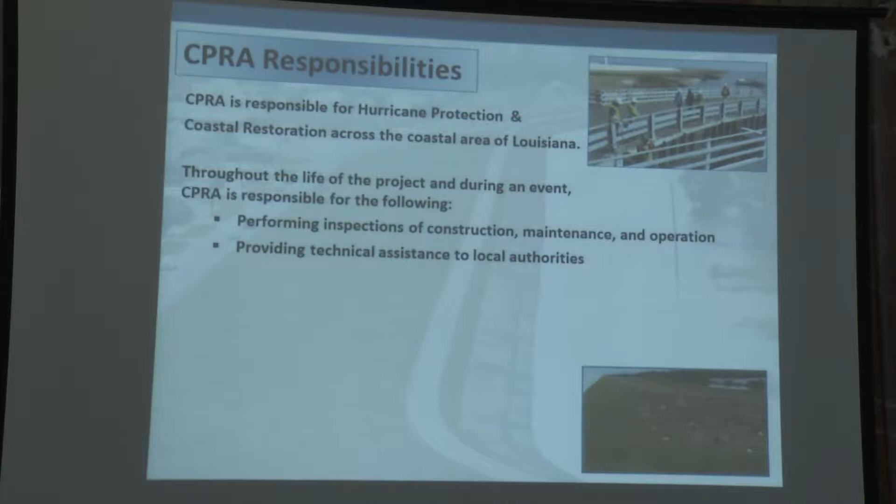Since we're partners in all of this, we rely on them sometimes to give us some technical assistance. We also review a lot of permits. I know you guys have seen a lot of work going on, and there's companies or anybody that wants to build something near the levee. We, along with the Corps, have to approve that project, and at the end, the local SLFPA-East, for instance, is the one that gives these permits out. But again, we do the engineering, we check all of this, make sure things are right, and the Corps does the same thing. We do a levee inspection training class every year, sometimes twice a year, depending on how many people request it, and we do a certification.

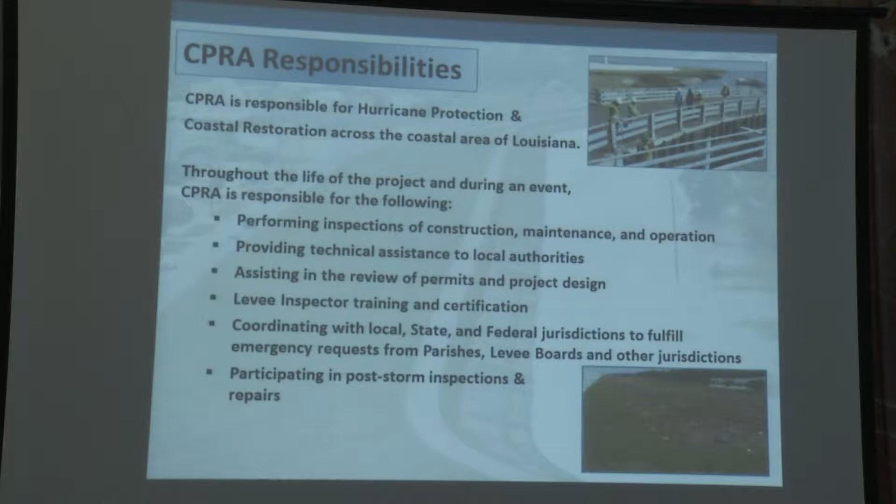We also coordinate with local, state, and federal jurisdictions to fulfill emergency requests from parishes, levee boards, and other jurisdictions. We also, after a storm, participate in inspections with the Corps and the levee districts to make sure we know what happens and what repairs need to be done, if any.

So, talking about the HSDRRS system, this system, as you guys know, was $14.5 billion. It's about a $14.5 billion system that was designed by the Corps of Engineers. It consists of 350 miles of levees and flood walls, 73 pump stations, 3 canal closure structures with pumps, and 4 gated outlets. This system is to reduce the surge and rainfall risk from a 100-year storm.

So the perimeter of the system, I'll show you in a second, is comprised of levees and flood walls, and that's to reduce the surge. Then you have the rainfall risk. For that, there's closure pumps, a lot of storm proofing done internally, and some drainage canals that were improved.

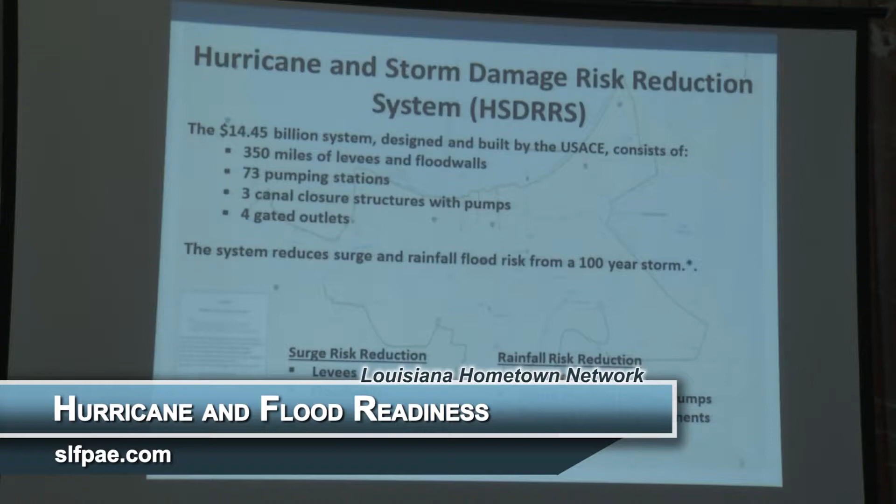So at the end, like I said before, we have to pay this back. It's a $3 billion payback that the state has, and it equates to about $100 million a year for the next 30 years.

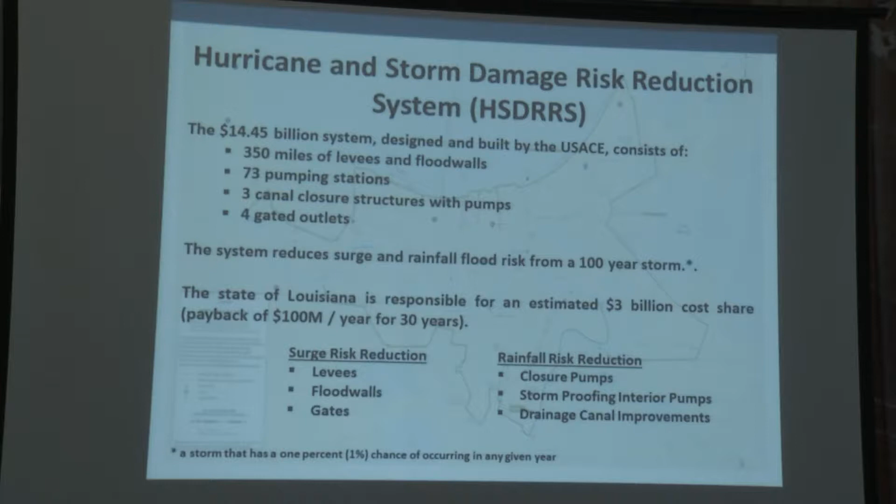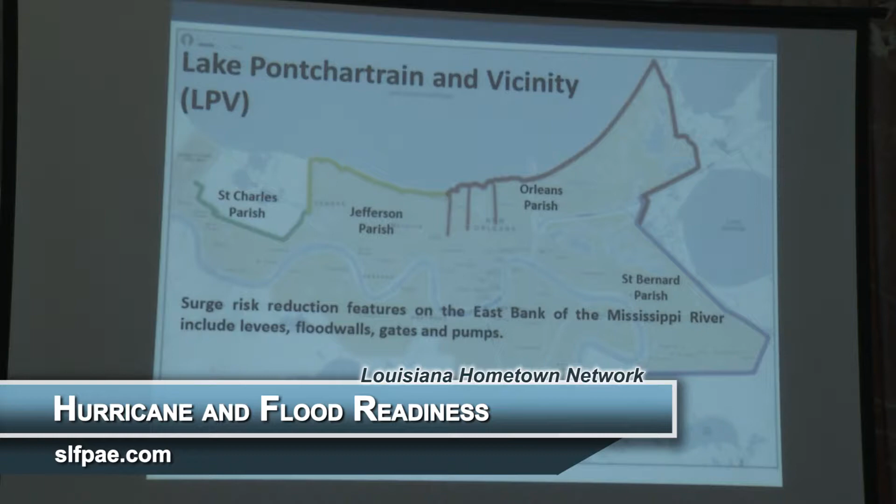So this system, we look at it in 2 parts. We call it the Lake Pontchartrain and Vicinity Project, which we refer to as LPV, and the West Bank Project, which is WBV. Right now, what you're looking at is the LPV project. In that project, it's to reduce storm risk on the east bank of the Mississippi River, and it includes levees, flood walls, gates, and pump stations.

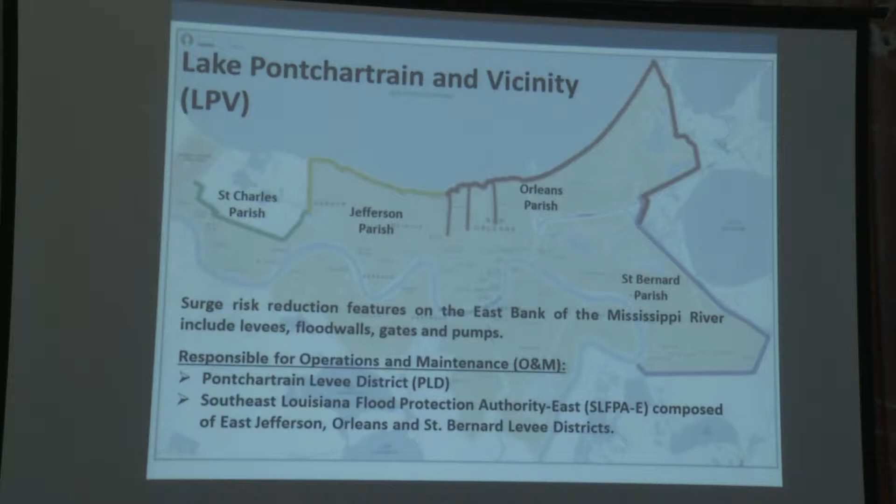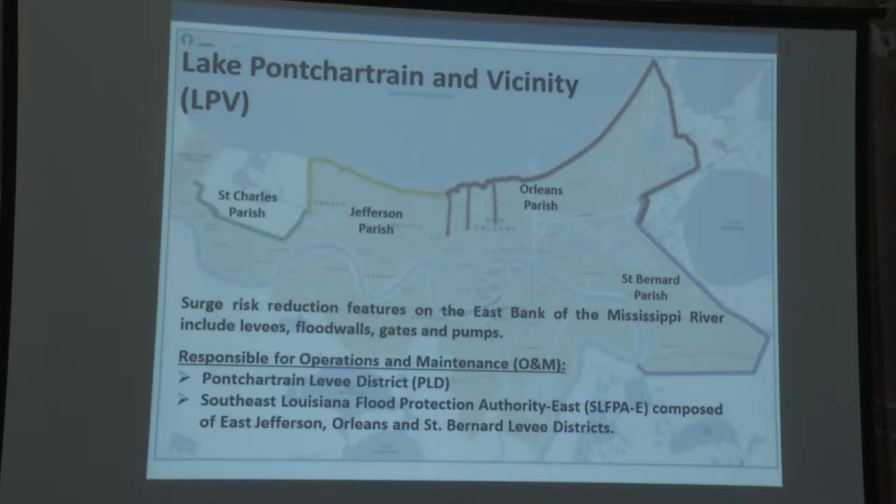Once the projects are turned over by the Corps of Engineers, we have to turn it over to the local levee districts. For the LPV project, it's the Pontchartrain Levee District and SLFPA-East, which is the Southeast Louisiana Flood Protection Authority East. SLFPA-East is composed of East Jefferson, Orleans, and St. Bernard, and they're the ones that operate from the yellow line to the blue line that you see on the screen.

Again, it's a system, so there were a lot of upgrades and a lot of things that were done, and one of the projects is the outfall canals, which we call the OFC canals. This is where most of the New Orleans rainwater during a storm drains through. The improvement was that the levees were lined on both sides of the canals with flood walls situated on top of each levee, so it was basically hardened. The improvements are along 3 main drainage outfall canals in New Orleans: 17th Street, Orleans Avenue, and London Avenue. Who's responsible for operations and maintenance? SLFPA-East.

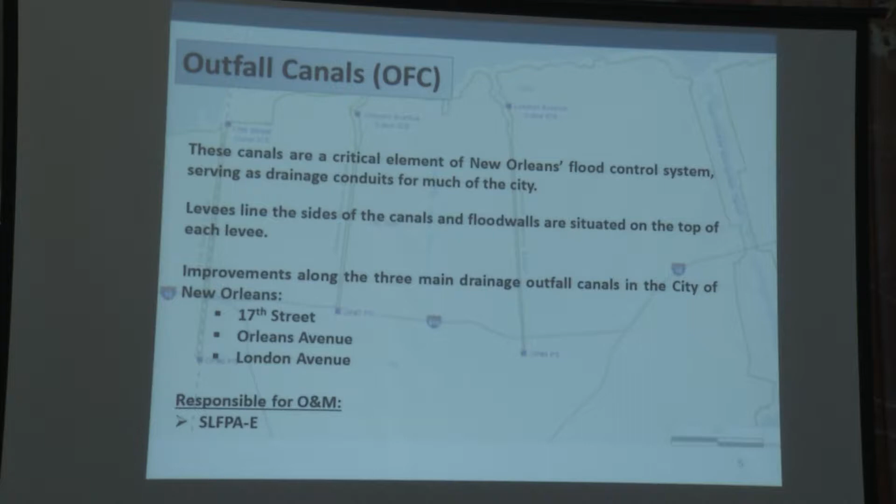Then you have the permanent canal closures and pumps, which we call the PCCP project. That's an ongoing project comprised of 3 pump stations, one located on 17th Street, the other Orleans and London, like I said before. So that water that comes in from the city goes straight to these pump stations and is operated accordingly.

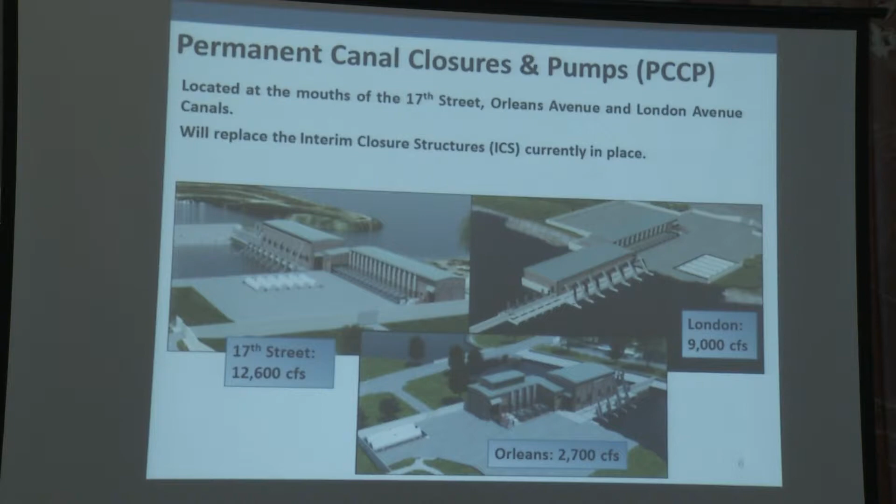I know you guys have seen that there are some old pump stations out there. We call those the interim closure structures, or ICS structures. Right now, if there were to be a storm to come into the city, those would be the pumps operated during the storm. The Corps of Engineers operates it. There's a water control manual on how and when you operate these pump stations.

The 3 pump stations that you see, which we call the PCCP project, are expected to be completed and turned over to us before the next hurricane season.

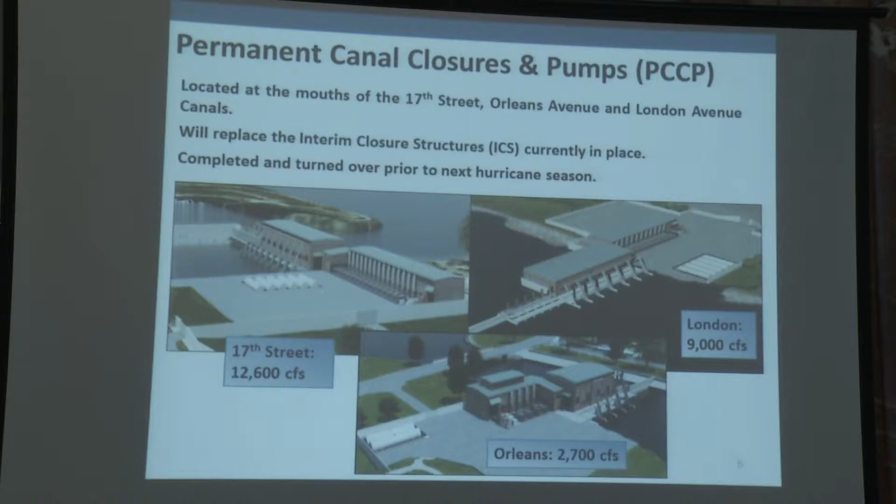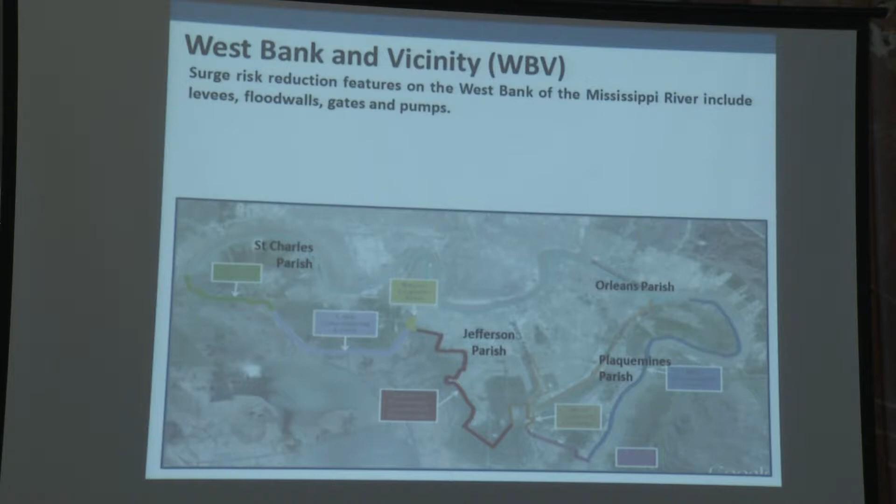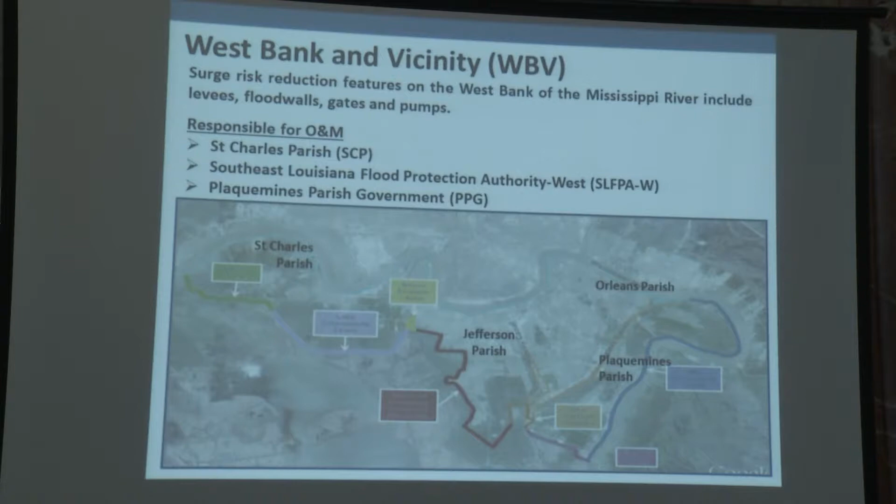So now I'm talking about the West Bank and Vicinity project, and I'll run through that again. It's the same thing as the LPV project: levees, flood walls, gates, and pumps were built on that system. Who's responsible for O&M? It's St. Charles Parish, the Southeast Flood Protection Authority West, and Plaquemines Parish.

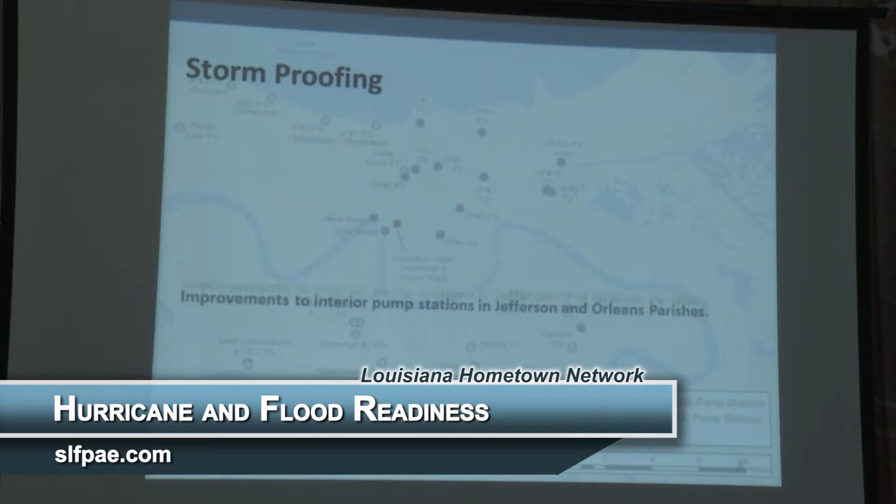Okay, so now we're getting into the internal part. I just went on the periphery, the external part of the system. So again, there was a stormproofing project internally. Those improvements were to interior pump stations in Jefferson and Orleans parishes.

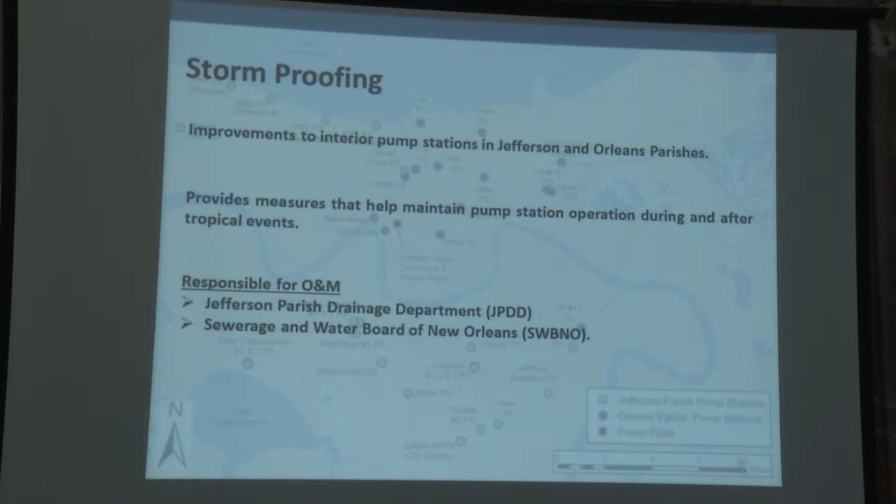These stormproofing measures help maintain pump station operations during a storm. So what does that mean? The stations were hardened, some of them were lifted, and where needed, an extra generator was put in. Different things were added as part of the stormproofing project. Who's responsible for O&M on this is the Jefferson Parish Drainage Department and the Sewerage and Water Board of New Orleans.

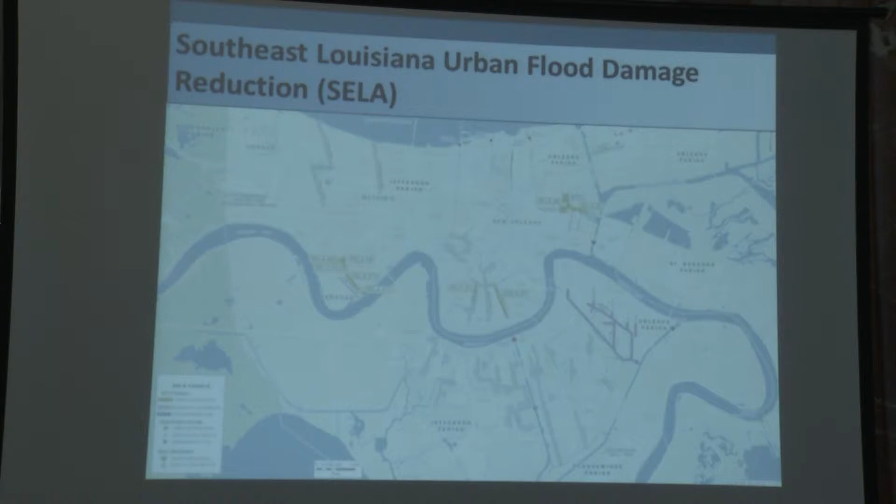Then we get to the SELA project. If you live in the city, you've seen a lot of construction going on internally - that's the Southeast Louisiana Urban Flood Damage Reduction System, the SELA system. That's an internal project to take care of rainfall, and it provides flood risk reduction up to a level associated with a 10-year rainfall event.

So what does that mean? It means a rainstorm that has a 10% annual probability of occurring, which equates to approximately 9 inches of rain over a 24-hour period in the area.

That system cost about $2 billion. There's been $2 billion of improvements in Jefferson and Orleans parishes, and it generally supports the parish's master plan. In other words, when we signed the agreement with the Corps of Engineers as the non-federal sponsor, we did a cooperative endeavor agreement with the local levee and drainage districts.

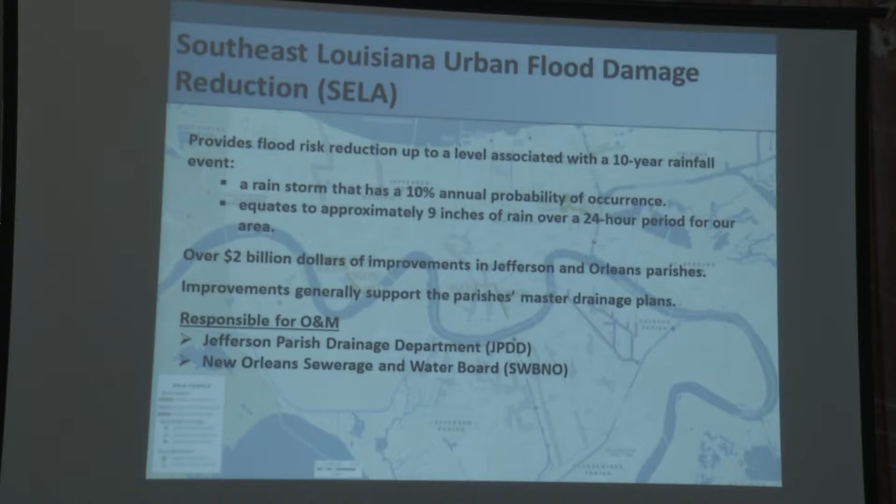In other words, they've been talking to the Corps of Engineers. They're basically designing their own project, and we're just the non-federal sponsor. At the end of all of this, they're also paying - Sewerage and Water Board and Jefferson Parish are the ones paying their cost share for this project to the federal government. So again, who's responsible for O&M on the SELA project? That would be Jefferson Parish Drainage Department and the Sewerage and Water Board of New Orleans.

And we have the armoring project ongoing right now. That armoring project is basically a resiliency feature added to the levees. So when storm surge comes over the levee, we didn't want scouring on the protected side. Think of it like a football field mat placed on top of these levees, with grass grown on top.

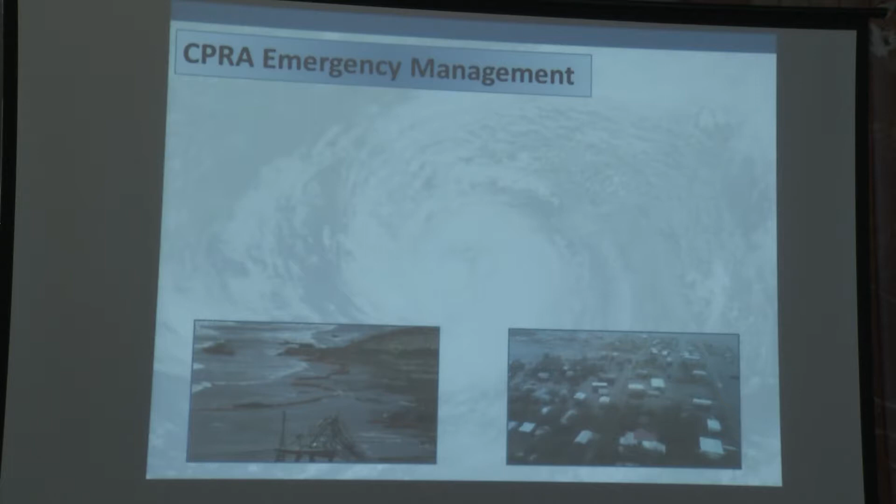I don't know if you guys are keeping up with the news, but that's part of our job too. My job is to keep up with the hurricanes and where they are and what's going on, so we can interact with the locals, the local entities, to make sure everybody's ready, the system's ready, the pump stations have fuel. I call it the big dance, because everybody's talking to each other. We're talking to the Corps of Engineers, SLFPA-East, Plaquemines Parish, everybody around the system.

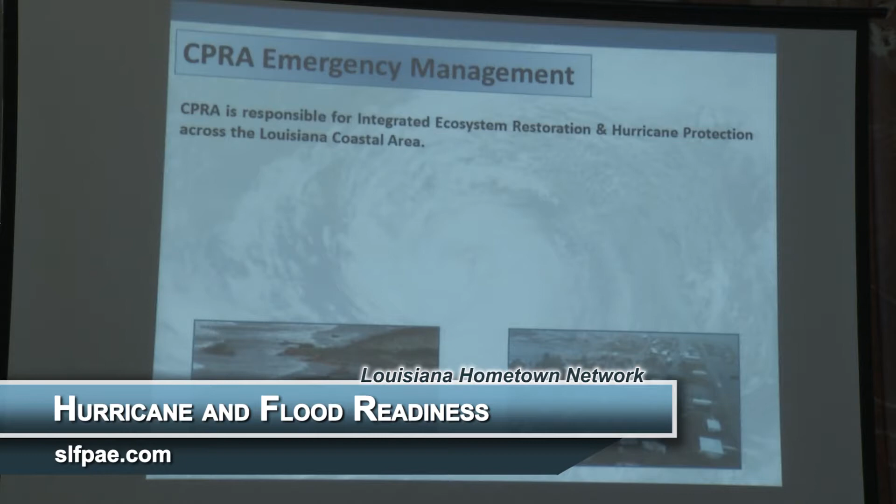So that's part of the other part that we do during a storm. Again, during hurricanes there's high water events, we get called in, and large-scale coastal oil spills or hazmat incidents.

What I'm going to talk about a little bit today is the inspection process. Joe asked me to talk about that when it comes to the work we do here at the authority. First I'll talk about the infrastructure we have to take care of, the things that make up the levee system that form the defense for hurricane storm surge and riverine flooding for the metropolitan area. Then I'll tell you about the inspection process, how that works, who's involved, and the different types of inspections we do.

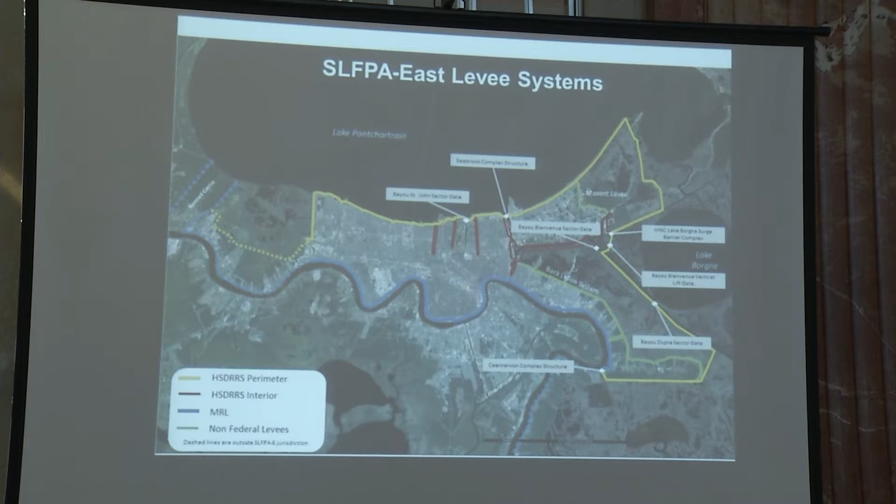This slide is basically a layout of our system, and you'll see different colored lines. The yellow solid lines are what we call our perimeter system for the hurricane storm damage risk reduction system. This is the front line of defense. The red lines are interior levees, interior to that perimeter system. They are no longer part of the main line of defense.

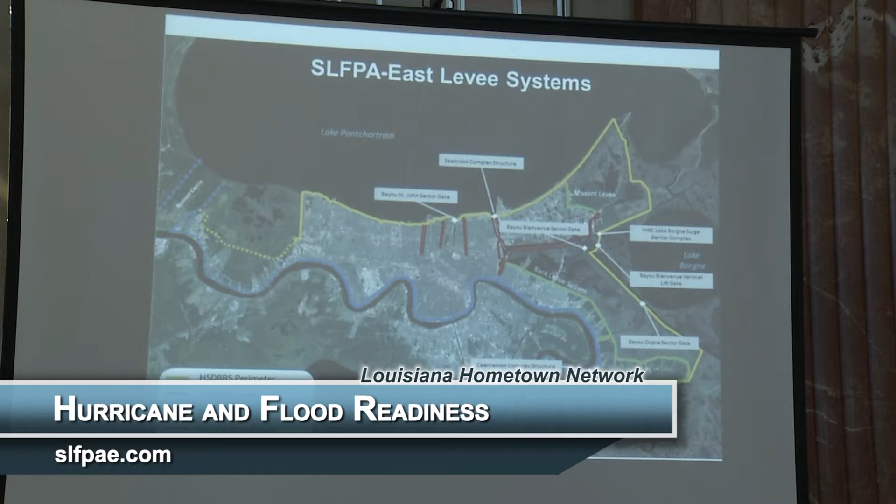Prior to Katrina they were, now they're not, but they're still needed because they still hold back water under certain circumstances, so they still have to be taken care of. Then you'll see some green lines, levees built over the years, typically by the local authorities. In some cases they were the original hurricane levees built many years ago. They're still in service today because they form a barrier for drainage, so when the rains fall and the pumps kick on, the water is pumped on the other side of these levees to keep the populated areas dry.

To give you an idea of what that equates to in statistics, we have over 192 miles of levees and flood walls within our jurisdictional area. That's a lot. Over 3,500 acres of turf that we have to maintain. It's a lot of grass cutting, and it sounds somewhat superficial.

You guys just cut grass, but let me tell you, that's a really important part of the job, because if we don't cut that grass, trees grow up on the levees, and the levees fall into disrepair. You can't take care of them, and they can develop leaks during a storm. Also, maintaining good turf cover prevents erosion. If you get a storm larger than the levee was designed for and the water comes over the levee, that turf keeps the levee from washing away.

Floodgates. Ignacio talked a little bit about this dance. Well, we have a well-choreographed dance that we have to do whenever there's a storm coming. We have over 240 floodgates that in a major storm we have to get out there and close. Our people have to go out there in inclement weather and difficult conditions to make sure all those gates are closed so the water doesn't come in.

A new addition to the system since Katrina are all these navigational floodgates. These are very complicated structures from a mechanical standpoint. Typically levee districts dealt with earthen levees and maybe some flood walls, but now we have these heavy-duty mechanical, electrical type structures that we're responsible for taking care of. We have 8 of those, and a couple are major structures. So a lot of infrastructure to take care of.

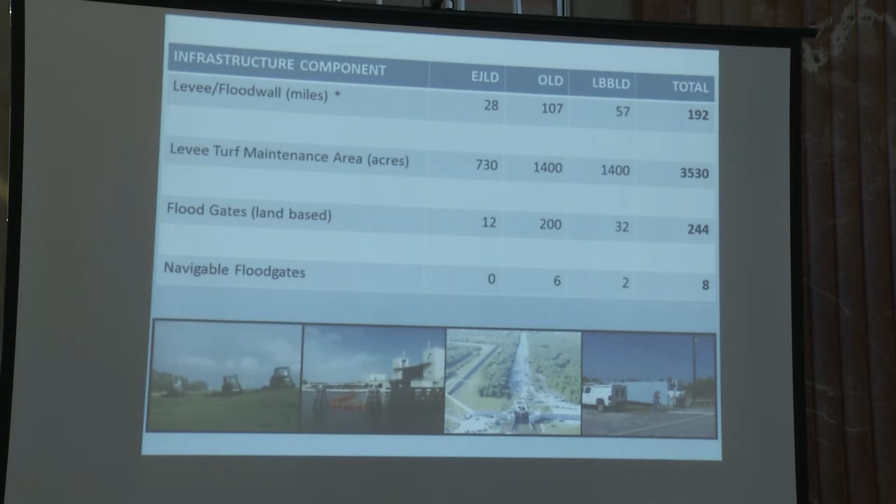And so we have to be good stewards of that $14 billion that Ignacio talked about. One of the ways that we try to make sure that we are doing our jobs well is we do a lot of inspections on the system.

We have what's called this levee inspection cycle. It starts off with field inspections. We have inspectors that go out there, look at all the various pieces and parts of the system, take notes, identify any issues that they think might be issues, and turn that in to the engineering department.

There's an engineering review of all those comments, all that data that's been collected in the field. The engineers take that and prioritize it, saying these are the things we need to address quickly, these are some things we have time to deal with, and perhaps there are other things we just need to monitor. We make that decision in our engineering department and prioritize those issues that we find in an inspection.

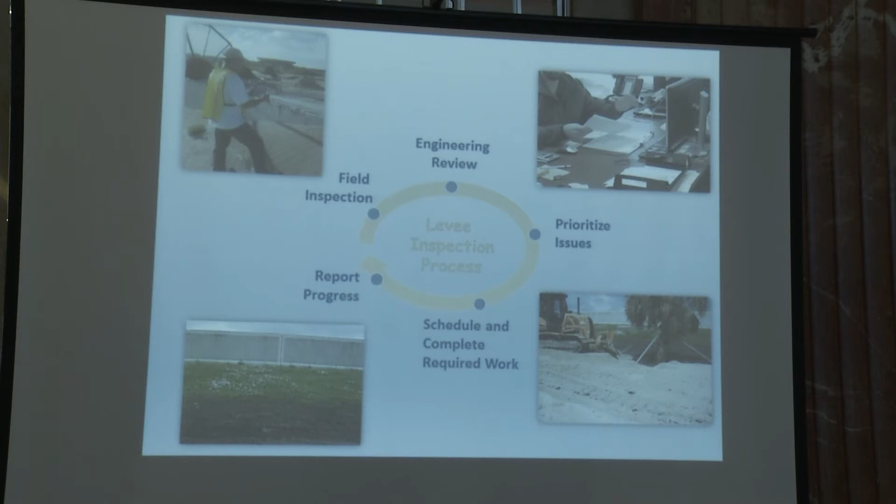Then we get with our operations group and we schedule that work, complete the work, track it, and report the progress back up the line. And then the cycle starts all over. This is just the basic cycle for routine inspections.

To facilitate this, we've had to go out and start developing some software to make sure we're keeping abreast of the latest technology to collect the data and actually use it in an effective way. After Katrina, when we started doing these inspections and documenting them, it was all on paper. I used to get a stack of paper from the Orleans Levee District, I'm not kidding you, it was this tall that I would have to go through for an inspection report, and I had to sign, it must have been 75 or 80 pages with every quarterly inspection that came along.

So we started looking for better, more efficient ways to do that, because with all that paper, there's always a chance you're going to skip something important. So we got with the West Authority. They had started developing a piece of software for collecting this data in the field. We took theirs, made some modifications to it, and we've incorporated that into our workflow now.

The way the system works, it's a drop-down menu system that's on a pad. If you look in this picture, you see our inspector out there, he has a pad with him. So he can go identify an issue, take a picture of it with that pad, record all the comments associated with that issue, and it's stored into a database. There are messages sent to various people that this data has been collected, and then we can review it and take the necessary action.

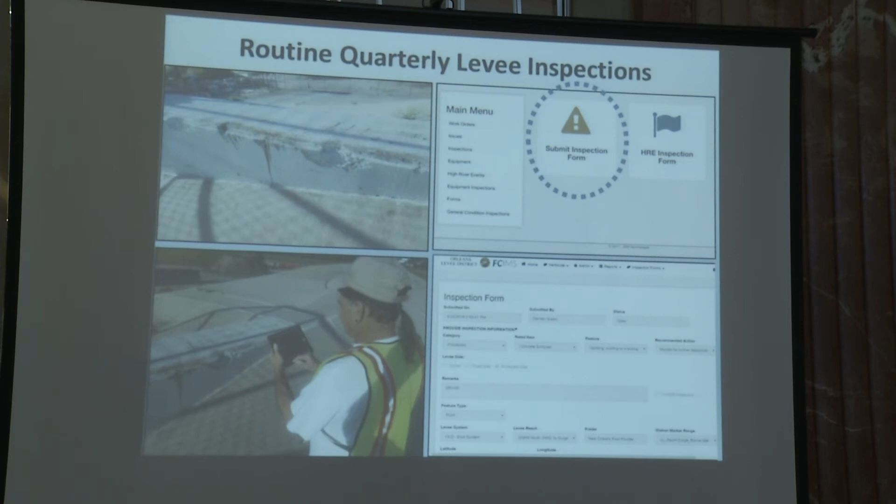This is for routine quarterly inspections. These types of inspections are done 4 times a year by our people. Then we have these other types of inspections that we do. It seems like lately we've had some high river events more frequently than perhaps in the past 20 years or so.

We have this Mississippi River levee that protects the city and the outlying areas around the city. We have to be very cognizant of what's happening with that levee, because when the river is high, maybe as high as 17 feet at the foot of Canal Street, you're going about your normal daily lives without a single thought about flooding. But if that Mississippi River levee has a problem, that is a big problem for all of us. So we take that job very seriously.

We're out there whenever the river is high, inspecting that levee. In fact, when we go to a phase 2 flood fight, we're out there every single day, 7 days a week, collecting data and making sure we understand what's happening with the levee, and taking any necessary action if there are any problems.

Talked a little bit about these navigational floodgates, these complex structures. We developed a special piece of software for our maintenance crews to make sure we're inspecting them properly. To do the actual quarterly inspections, we have a team of people from a consultant that come out 4 times a year and inspect those structures, like the surge barrier, the sector gates, and other navigational floodgates.

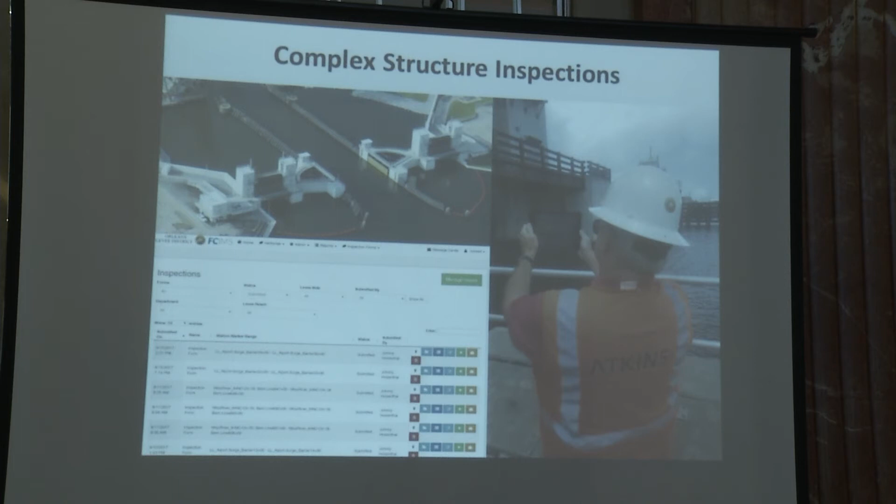The routine quarterly inspections, we take care of that. That's our responsibility. CPRA provides assistance to us in that regard, and we report those results out to both CPRA and the Corps once they're done.

Annual inspections are done by the U.S. Army Corps of Engineers. We participate with them on those inspections, and then they send us the reports after they've done their inspections. We review those reports and make any necessary work orders and get the work done if anything has to be done.

One of the most comprehensive inspections we do after the system is built is called a periodic inspection, done by the Corps of Engineers. They'll come out about every 5 years, look at the system, make sure we are doing our jobs and being good stewards of the infrastructure that's been turned over to us, and the reports are turned over to us and CPRA.

But then we have damage assessments after every storm. We inspect those, all of us get together and do that, and we share that information. Same with the flood fights.

After all this is done, really during this whole process, twice a year we file semi-annual reports with the Coastal Protection and Restoration Authority, and they compile those reports with everybody else in the state that has levees, and turn that into the Corps. So it's a very rigorous process, and I can tell you the people in this business take it very seriously, and we work very hard to make sure we get it right.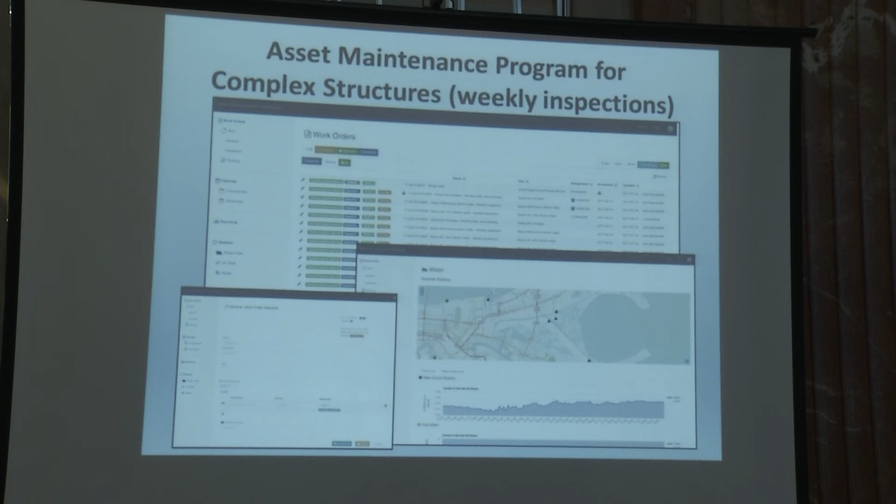So you see, we have a whole lot of really spectacular infrastructure that we take care of, a lot of assets entrusted to us that we have to make sure we do a good job with. But you know what? It takes people to do that. Our most valuable assets are really our people, because with all the inspection work we have to do, and all the operations I didn't even talk about today, you just can't build a system and walk away from it. It takes people to take care of it and people to operate it.

I've got to tell you, I'm really proud of the people we have working for us. They do a great job, they take their job seriously. Many of them have been working here for a long time, many years, longer than I have. I'm also very proud of the support and help we get from our partner agencies, particularly Coastal Protection and Restoration Authority and the U.S. Army Corps of Engineers. They provide us with valuable assets we might not otherwise have. And with that, that's all I have.